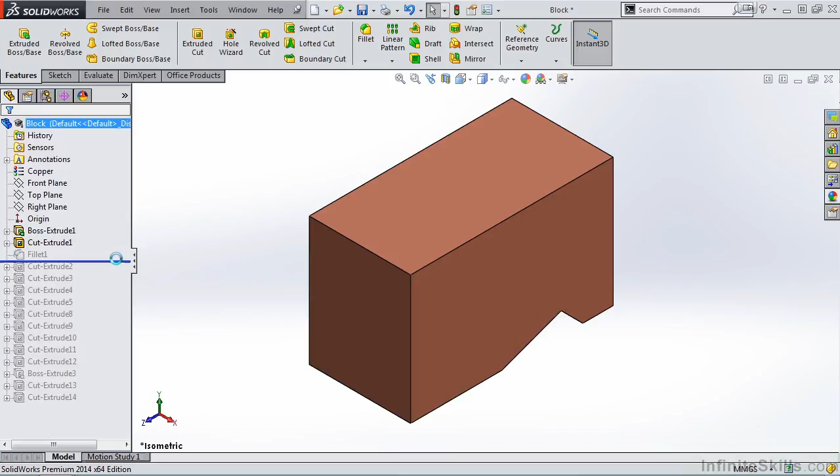Before we edit any existing sketches or existing features, let's take the rollback bar and roll it back to the very beginning of the Feature Manager design tree, just to see how the model was constructed. It appears we have a simple rectangular block, and as we take the rollback bar and roll it down the Feature Manager design tree, you will see the part slowly evolves into the finished part.

Now, after the part is created, let's assume we want to change the angle of this bottom cutout, which is currently at 20 degrees, to 25 degrees. While there's some different options for this, the easiest method will be to edit this existing sketch. So I'm going to go to the Feature Manager design tree, and moving my cursor down the tree, notice when I'm above Cut Extrude 1, that feature highlights.

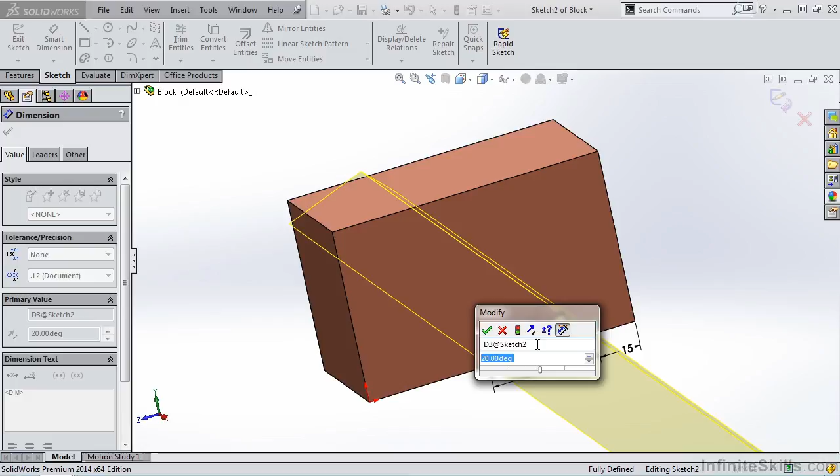So I am going to expand that feature, select Sketch 2, and then Edit Sketch. I can go back out to the graphics area, double click on 20 degrees, and change it to 25. I'll close out of the sketch, and editing an existing sketch is as easy as that.

Now let's take a look at how to edit an existing feature. In fact, let's edit the depth of this cutout. So I'm going to go back to the Feature Manager design tree. Moving down the Feature Manager design tree, I'll locate the feature, edit the feature, and notice my depth is set to 9. I'm going to change it to 10.

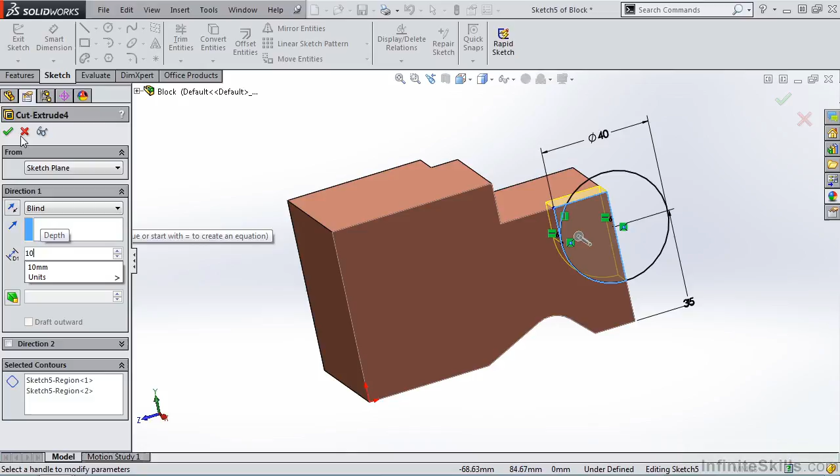Now that may not seem very efficient to go back and forth between the Feature Manager design tree and the graphics area. SolidWorks does allow you to select the feature on the screen. Now notice the different color dimensions. We have black dimensions and blue dimensions. Black dimensions represent sketch dimensions, and blue dimensions represent feature dimensions.

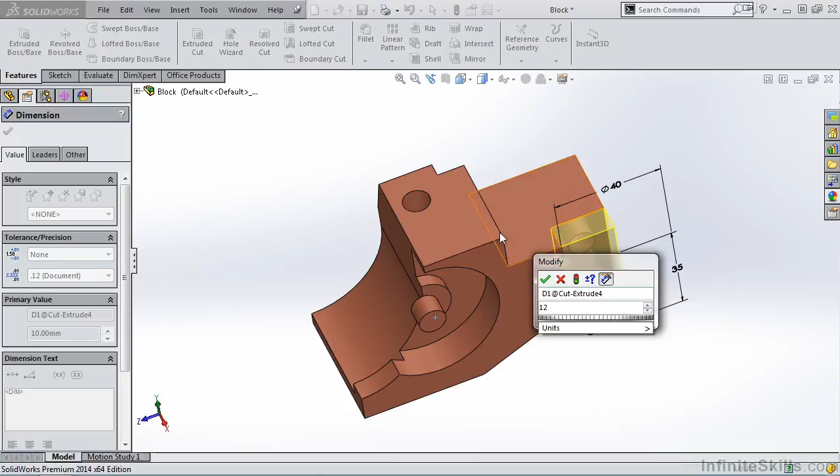You can change either of these on the screen. You can change sketch dimensions or feature dimensions. So if I double click the 10, I can change it to 12. Or if I want to change the sketch, notice I can change it on the screen.

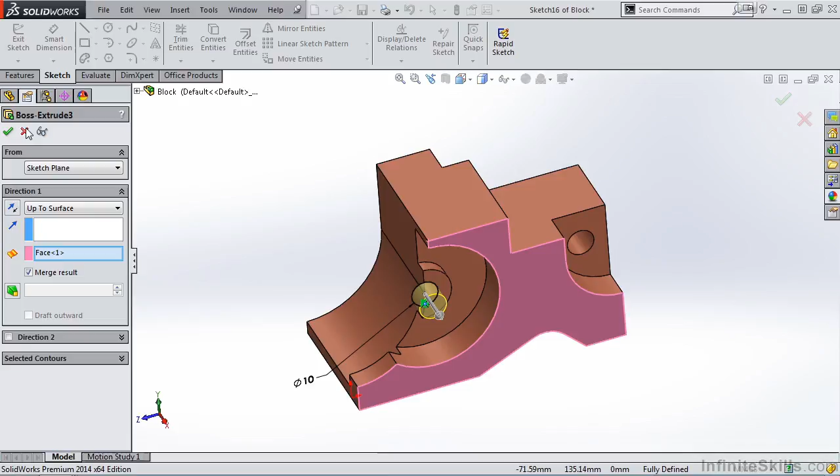Now, not everything is going to be able to be changed in the graphics area. For example, on this feature here, if we take a look at this feature and edit the feature, the length of that pin was based on up to surface, which is this face here. So in order to change the length of this pin, we would be required to go back to the Property Manager. So that gives you a few ways to edit existing parts.